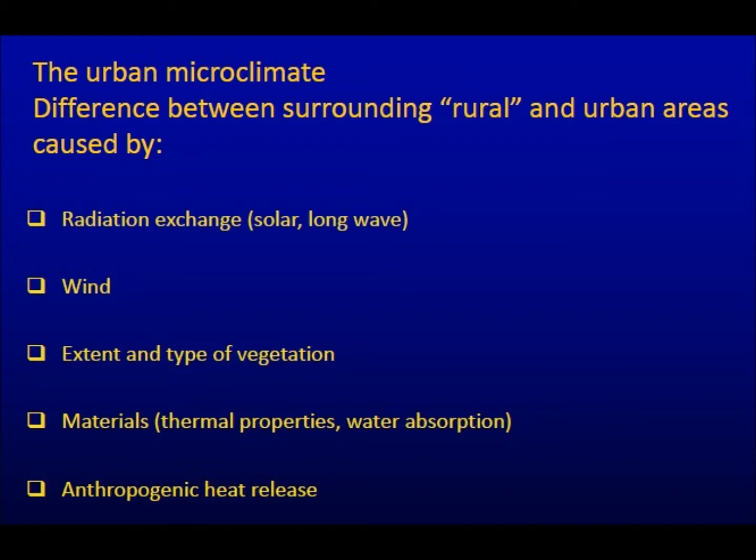The anthropogenic heat is the amount of heat produced by human activity. And we can see here some research; the first one here shows a recent research in London, and this one is in Singapore. And the urban heat island kicks in between sunset and sunrise.

So when people talk about the urban heat island and the hot days or something, that is not actually a typical urban heat island. The urban heat island is mainly the difference between the city temperature and the rural temperature during the night time, not during the daytime.

And you can see here that in London, where it's hotter is in the early morning hours, and here in the evening hours it starts to kick up. And in Singapore here you can see between sunset and sunrise is when the urban heat island is occurring.

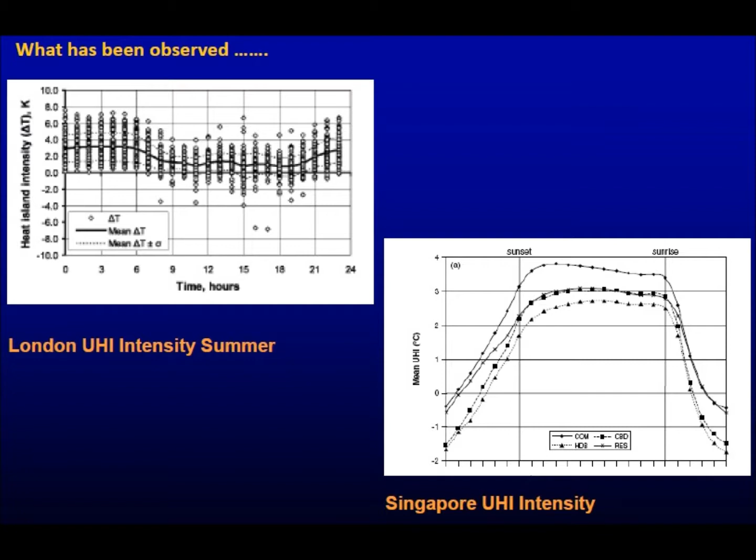There's been a correlation found between urban population and urban heat island. So what would be the maximum temperature difference that we would expect between Adelaide city and the surrounding areas? Would anyone guess? Adelaide population is about 1 million, so perhaps we would expect something like 9 degrees difference in maximum heat island effect between the rural surrounding areas and Adelaide.

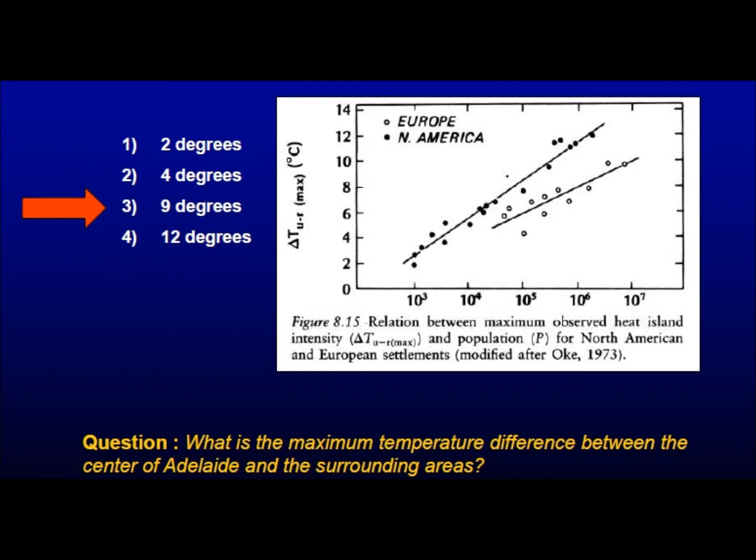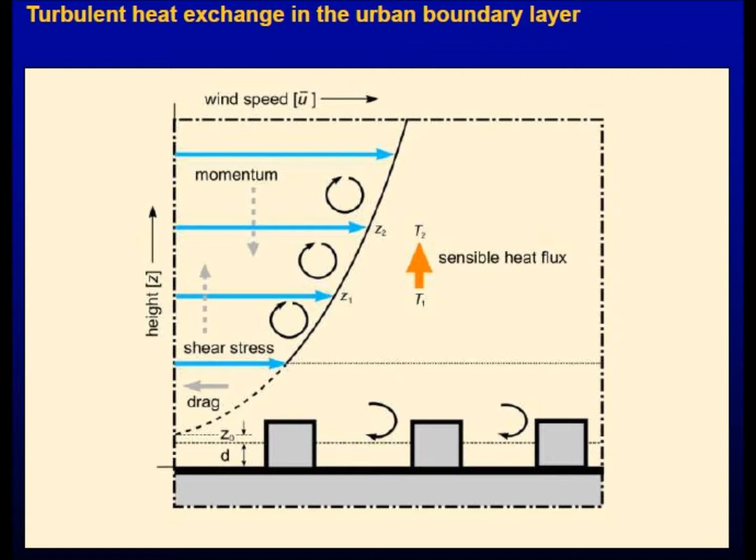And it's due, as I said, to a number of reasons: the difference in the way in which radiation impacts upon the rural areas and the city areas, the difference in the way the wind is affected between the rural areas and the city areas, and the way the wind acts around buildings, and anthropogenic heat.

So these are just some data. The anthropogenic heat that's been measured, a very difficult thing to measure in cities, but you can see that it varies between 3-4 watts per square metre and perhaps up to 200 watts per square metre. What does that mean? Well, if you're out in the sun today, the radiation might have been something in excess of 1,000 watts per square metre. So the anthropogenic heat maximum is maybe a fifth of that.

So another question: where would heat be ejected in cold climates in a city? The answer is through the building envelope. The interior of the buildings is likely to be hotter than the outside, so you're getting heat going through the building envelope.

But where does heat get ejected in hot climates? Anyone have any idea? If it's cooler inside than outside, there's not heat being ejected. But there is, because it goes through the air conditioning systems. So it's the air conditioning systems that are actually providing a lot of the anthropogenic heat in hot climates. So what did we do?

Our particular interest in doing this research was not to study the urban heat island per se, but we are interested in the thermal simulation of the performance of buildings. And the climate data that we have available tends to be measured at locations of Bureau of Meteorology, perhaps at airports, in Adelaide, perhaps at Kent Town.

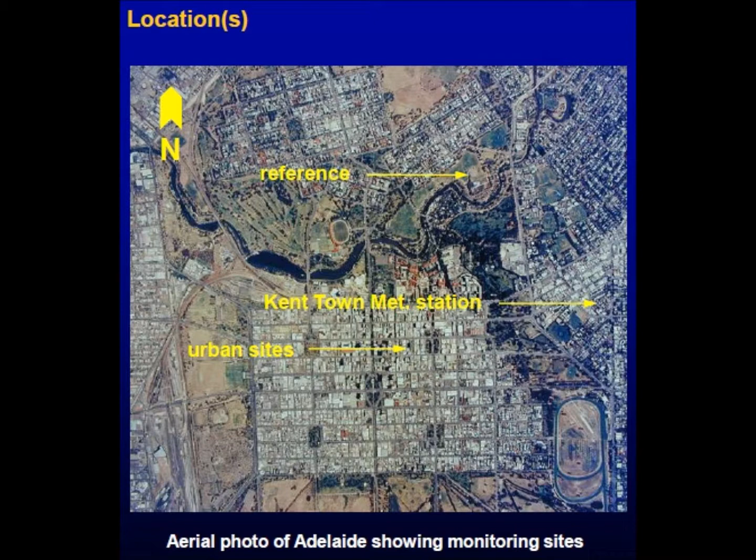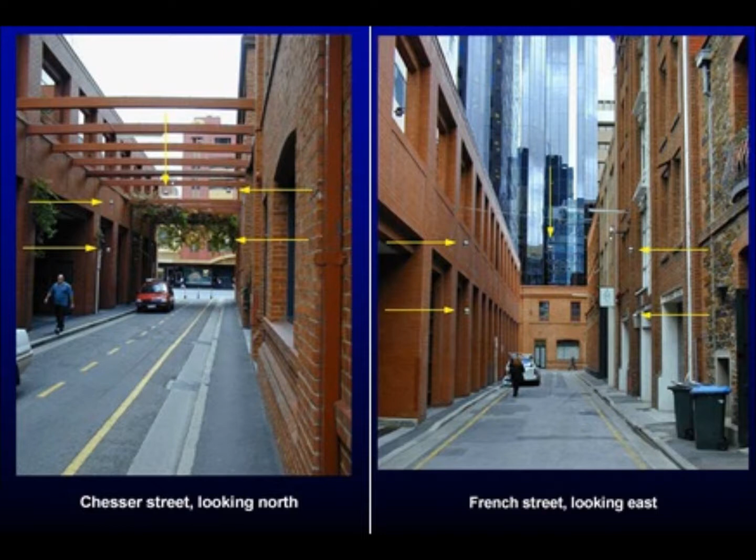What we did, set up a monitoring network, and we had basically 3 stations in Adelaide. Our urban sites, which I'll talk more about in a moment, and 2 reference sites, one at the Bureau of Meteorology and one in the northeast parklands, out in a site that is the nursery site for the Adelaide City Council. In the city, we had measuring networks in Chesser Street and in French Street.

And these, we have a whole pile of things like this, and if you examine those really closely, because this was low budget research, they're actually plastic dinner plates stuck there. And that was a result of literally hundreds of ways of trying to get some cheap solar radiation shields that we could measure the temperature and humidity in, and it turned out to be plastic dinner plates from Woolworths, actually.

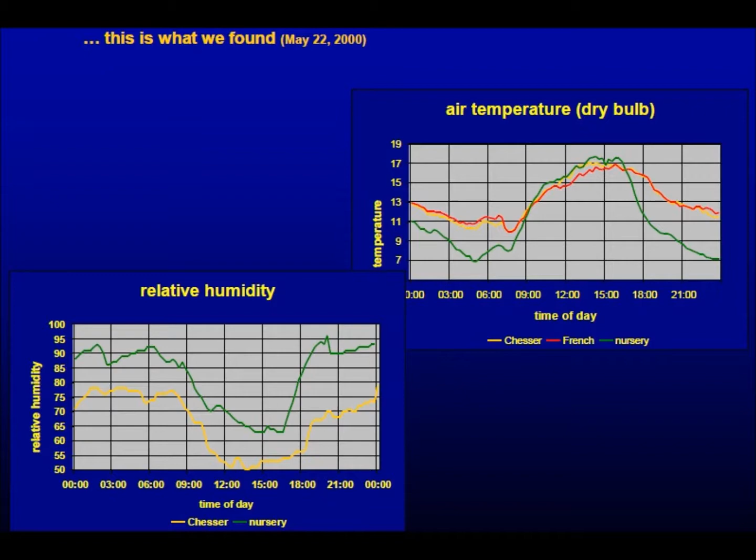But we also measured another very interesting thing, which had been hypothesised in the literature but not actually measured in great detail. And this is a cool island effect. So during the daytime, it was actually cooler in the city. And this was an effect that we found constantly, which I'll show in a minute. And there is a difference also. This is the relative humidity, which was much drier in the city compared to the reference site.

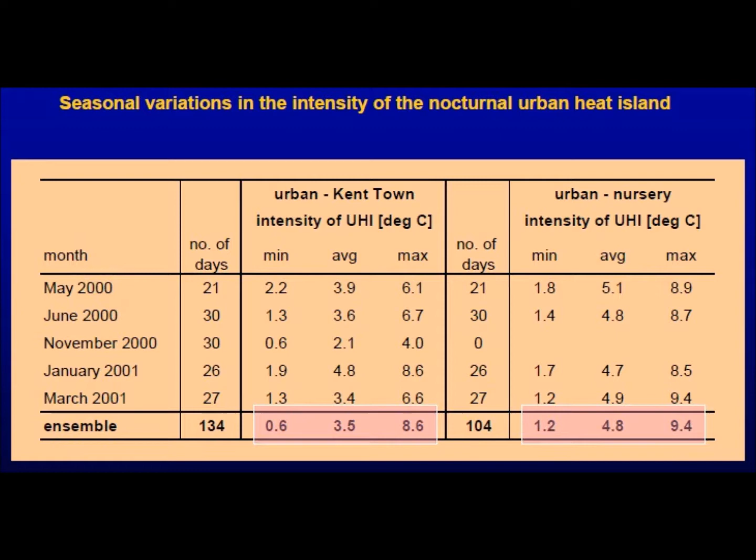So if we just look at some details, the monitoring actually was over about an 18-month period, and you can see if we compare the urban sites, this is the average of all the temperatures that we took, to Kent Town. This is the interesting one. 8.6 was the maximum average urban heat island, very close to the 9 that we showed before. And between the nursery site and the city sites, we in fact got an average maximum greater than 9. If we look at the urban cool island effects, it's not as great as the urban heat island, but it's still significant, and between the nursery and the urban sites, a difference of -6 degrees.

There is a difference between street orientations, so we're measuring in Chesser Street and French Street, and without going into great detail, where it's positive here, Chesser Street was hotter than French Street, so Chesser Street's running north-south, French Street's east-west. So where the line is positive here, Chesser Street is hotter than French Street. So there's a difference in orientation.

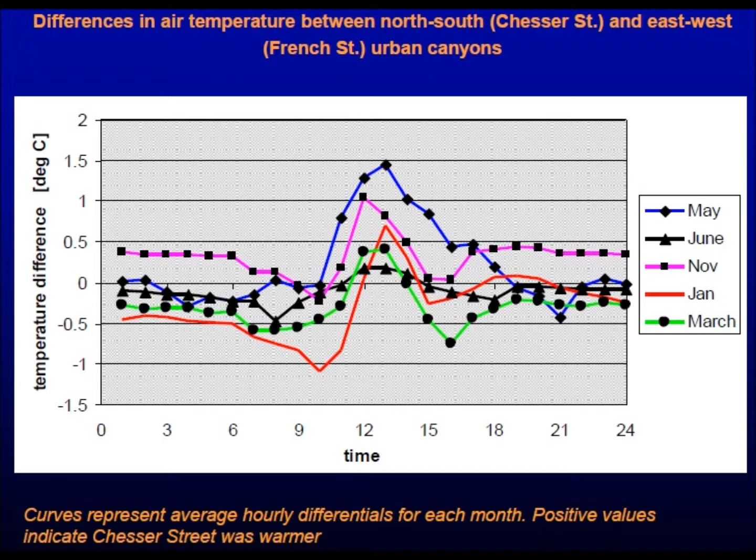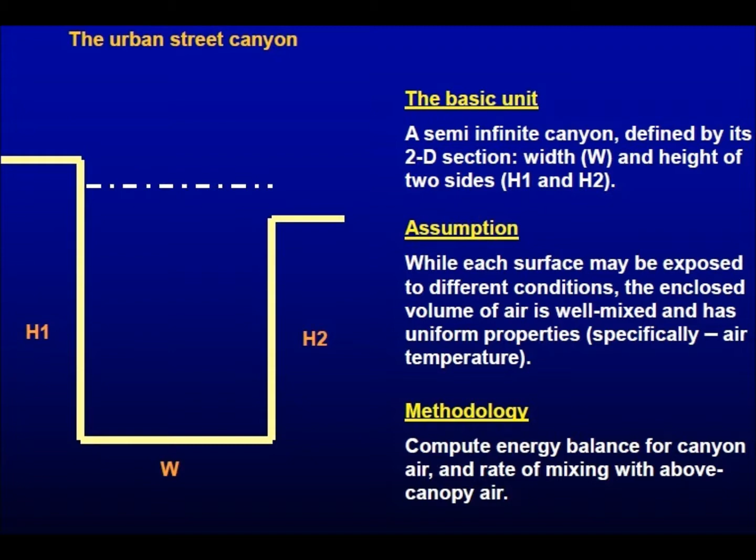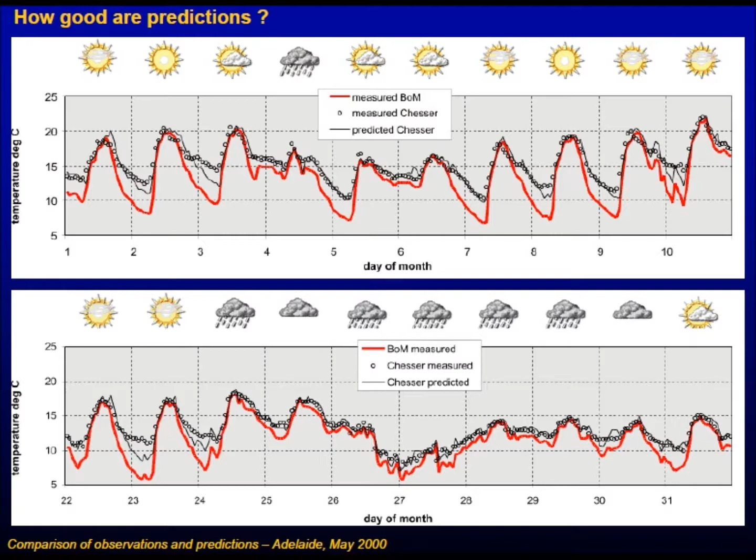Just to show you a few statistics, the mean monthly temperature in the Kent town was 13. What we measured was 14.6, and what we calculated was 14.6. And most of the other statistics are quite accurate as well.

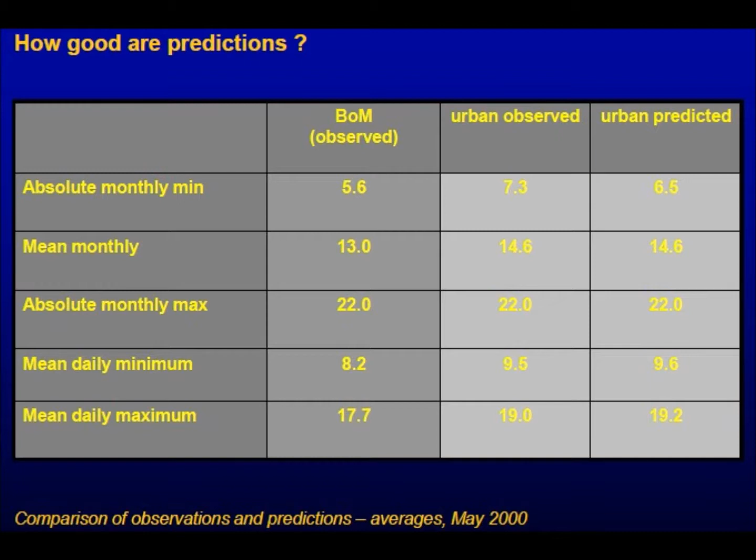And just to show off a bit more, we've recently got some very accurate data from a measuring site in Sweden, in Gothenburg, and we used the CAT model to predict, and you can see the same sort of results. We're actually predicting from a Met Bureau site what was actually measured in Gothenburg.

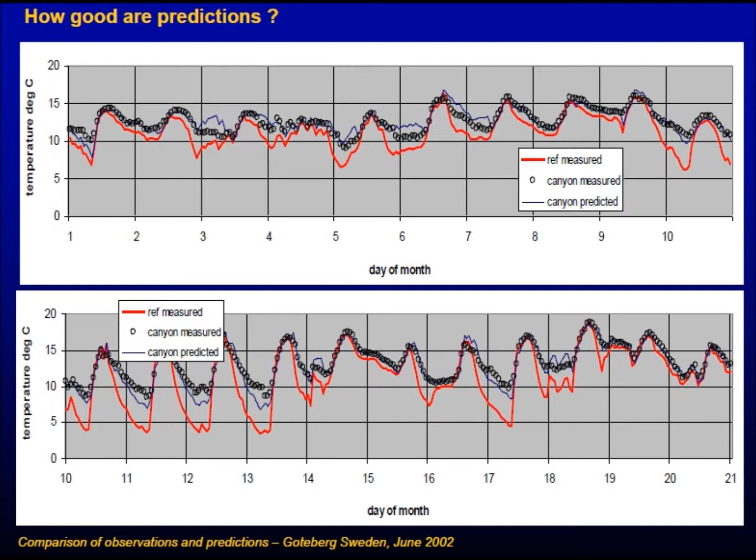So we can use this CAT app, this CAT software, in a number of ways. We can actually use it to look at site-specific temperature data and use that in our building simulations. We can look at the evaluation of microclimate conditions at specific locations. We can evaluate proposed planning regulations, if you like, planning proposals in terms of temperature effects, and we can use it as a research tool.

And what Veronica is going to now talk about is how we use the CAT model to predict the energy consumption in different planning scenarios in Adelaide. Thanks, Terry.

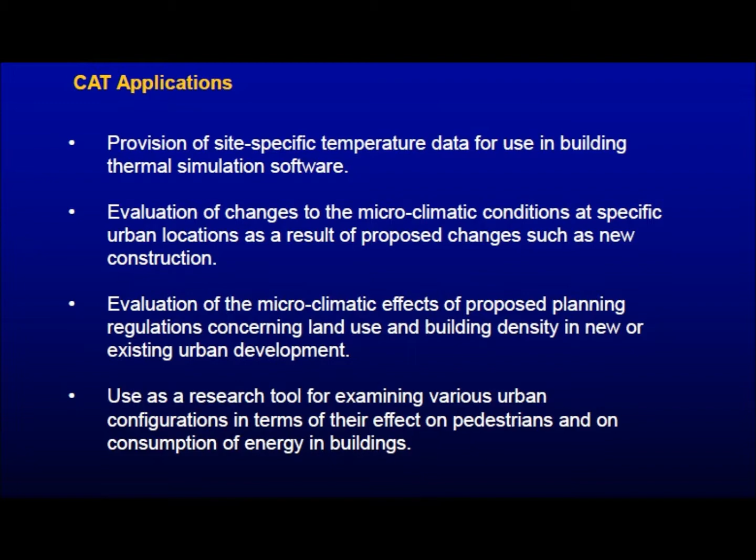So what we did was we used the CAT model and we simulated this hypothetical building. The building was actually designed by our students last year when they looked at green stars. So we used the building. However, we assumed that the building was surrounded by other buildings, so only one side is exposed to the sun.

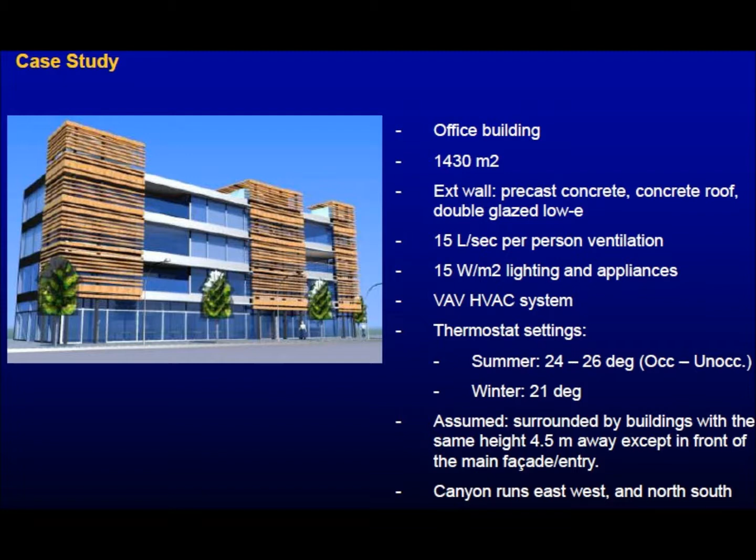So these are some of the parameters of the building. It's precast concrete with double low-E glazing. I have 15 liters per second ventilation, 15 watts per meter square internal loads, and so on, with thermostat setting between 24, 26 in the summer and 21 degrees in winter. So we tested it with different canyon orientations, as if the building is in Adelaide, so facing east, west, north, south. So the canyon runs either north-south or east-west.

The building is simulated by a simulation tool called EnerWin EC, Energy Compliance. It's developed in the United States, where I was involved a while ago. Basically, we can use any other computer model to test this, and this is the one that we chose. Basically, it's an energy simulation model based on the weather conditions or weather data.

So what we do is, instead of using weather data from the station, we use the CAT model predicted weather data. It takes into account the building geometry, materials, envelope properties, internal loads, and operation, and HVAC operation. So it predicts hourly, monthly, annual energy consumption, as well as heating and cooling loads and other things as well. So we look at different canyon ratios.

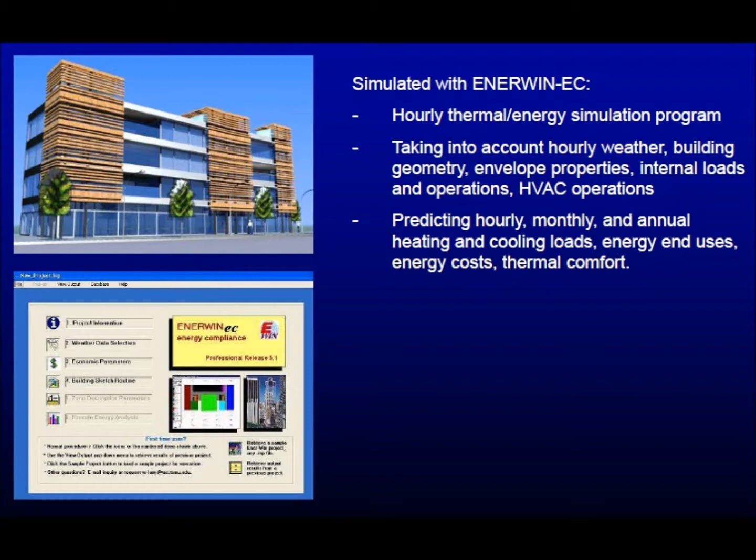So the first one is the denser configuration. So the height of the building is 14 meter and the width is 4, or 4.5 meter. So that gives the ratio of 4. And then the next is the ratio of 2. So the street becomes wider, where the width is half of the height of the building. The next one is the width is the same as the height of the building. It's like a 14 meter wide street, and wider streets even.

But we don't vary the height of the building because we want to see the effect on the same building. If we vary the buildings, then it has other variations. And also we look at a pretty wide street, where the ratio is 1/4 or 25%.

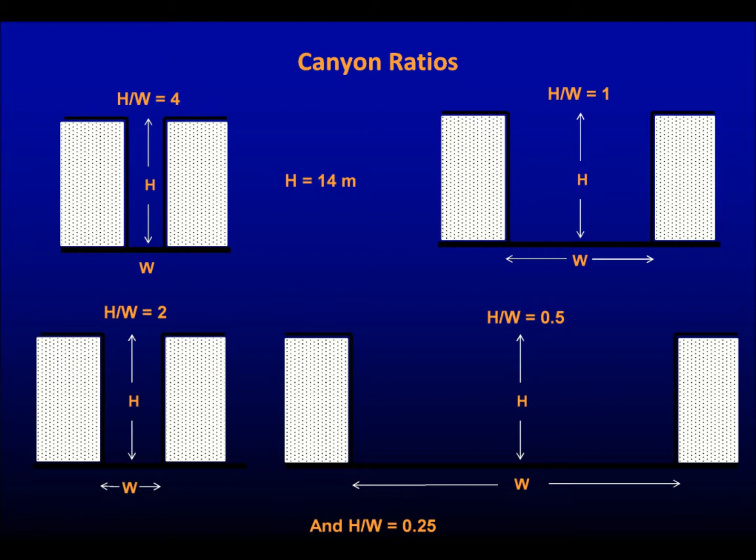So some of the detail here: the narrow streets tend to have higher anthropogenic heat per meter square because it's a denser street. With the same amount of traffic, of course, that becomes much warmer compared to a wider street. And also there is a clear inverse correlation between canyon width and heat island intensity. So once again, in the narrow street, you get a higher urban heat island compared to the wider street.

What is interesting, though, what we found: we take into account the urban heat island effect as well as the urban cool island effect, but also the denser the buildings, the more shade they create for each other. So there's also an effect of reduced solar heat coming to the building during the day because the building is shaded by other buildings. So the wider the street, the more heat gain you get.

So this is what we got on average: the wider the canyon, or the wider the street, you get less heating load, or the narrower it is, the heating load becomes higher. And simply because although you get more heat coming in from the urban heat island, you get less solar radiation because of the shading.

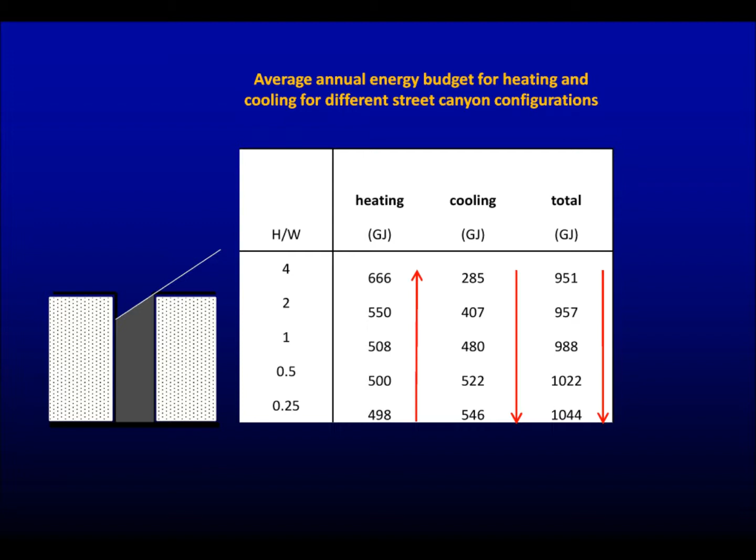Similarly, the cooling goes down as the street gets narrower. On the other hand, it gets larger as the street gets wider because you get a lot more direct gain. So what we found is, the wider the street, the more energy would be used by this building. So we looked at different building orientations. That was the average amongst all of these.

So the first one, the top left corner, is if the building is facing north. You can see the total effect is slightly increasing as the canyon gets wider. And you can see that the heating is going down as the canyon gets wider.

And is there any pointer here?

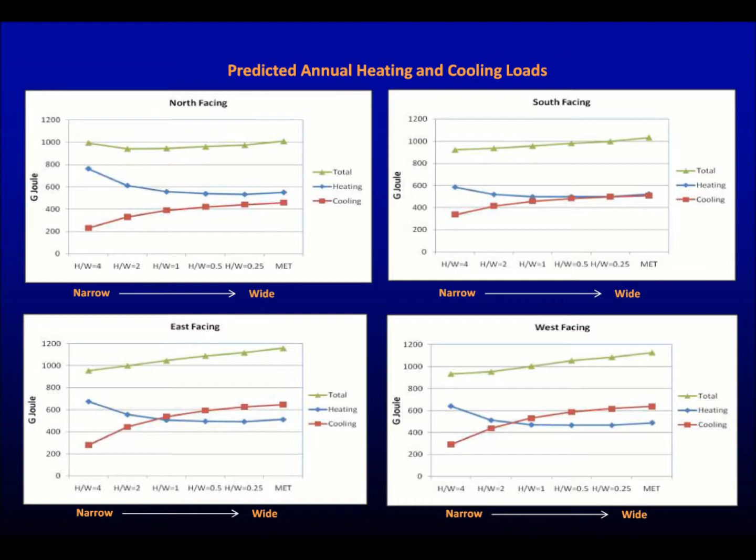And also as the canyon gets wider, the cooling is increasing. And similarly with all other orientations. So if you compare all orientations with different widths, you can see once again, the wider the canyon, the more energy we found. So in general, denser building configuration could in fact reduce energy use. It's probably not what we thought would happen.

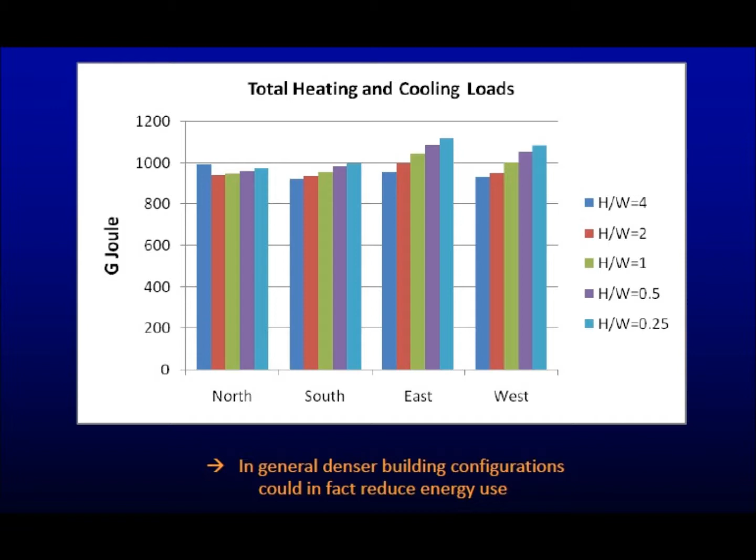What is also interesting is that in the denser configuration, east and west, north and south basically perform similarly. And it actually makes sense. You've got not much solar coming into the building, so it doesn't really matter what the orientation is. This is what we found quite interesting.

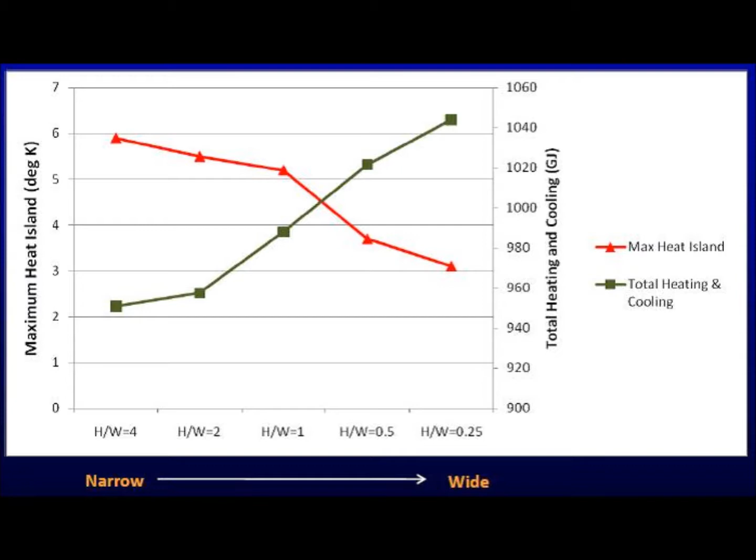So again, probably not what you'd expect: the narrower the street, the green line, which is the heating and cooling load, is actually getting less. So the wider the canyon, or the wider the street, the heating and cooling actually increase. And that's the reverse of the heat island. The wider the street, the heat island gets less, but the energy actually gets higher. I hope that all makes sense, although it's probably surprising to see that.

So in summary, what we found in Adelaide: results show that denser development produces a higher urban heat island, but also a greater urban cool island. The net effect could potentially result in a reduction in total heating and cooling energy, not the other way around. So I think we really need to see the whole configuration before we claim that the urban heat island could increase energy use. However, we don't claim that this is the only result that you would find.

Further research along the lines presented here, including the anticipated effects of climate change, could inform planning control. So we suggest that this research be continued by analyzing the effect of different building heights in various street widths. Because we have existing streets, we can't narrow the street down. So what sort of building height is most efficient?

Also analyze the impact of various exterior surfaces, as Graham suggested. At the moment, what we modelled is just a typical office building. We didn't put in a green wall or a green roof. What would happen? I think that's quite a challenging task that still lies ahead of us, but that's something we would like to see further. So that's the end of our presentation.